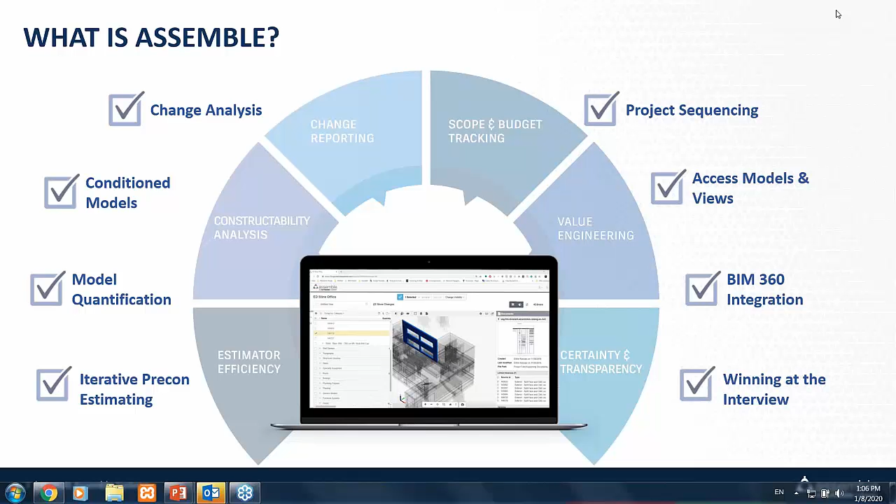Really easy system to get up and running with. These guys are going to show you some simplified workflows and dig into some more complicated data analysis. But ultimately, our key mission at Assemble is to break down and simplify access to BIM information and allow your entire team to leverage that data. Ultimately, we exist primarily in the construction space. Our customers are typically general contractors.

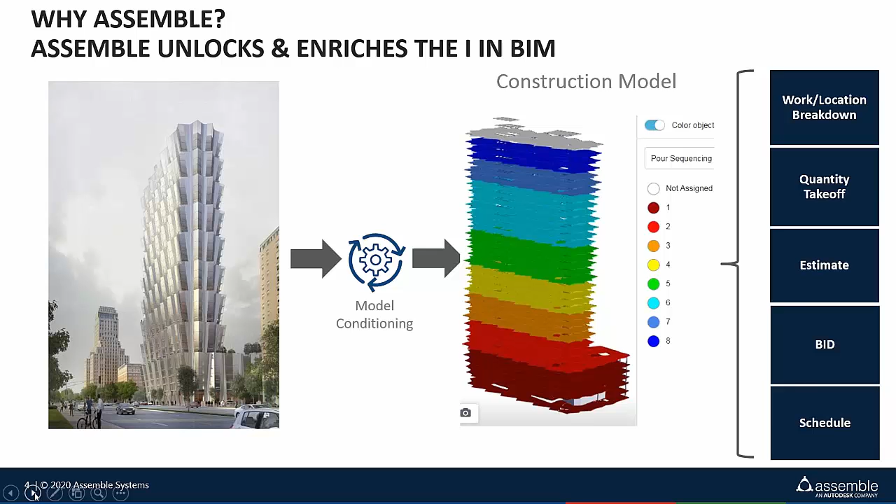And what we like to do is evaluate how we can take design content that comes from architects and engineers, condition that information, and make it valuable for the construction workflow, the construction team. In front of you, you see an output from the design team. That's a good-looking rendering. Well, those good-looking renderings aren't quite so valuable as the ability to communicate a task at hand, or the way you need to break down pours, or the way you need to organize your construction team for various workflows. Over to you guys, Tomislav, and talk a bit about Clayco.

Thank you, Tim. So before we dive into the nuts and bolts of our Assemble implementation, I'd like to use this opportunity to familiarize our audience with who Clayco is. And sometimes that's almost difficult to explain because we are a very complex, but at the same time very streamlined organization that in its core is a real estate developer and design builder.

We are comprised of several entities whose purpose is to deliver projects as turnkey solutions through optimized processes. Basically, we do everything from finding the sites, providing financing, design and construction services, and ultimately handover. Founded in 1984, so we're almost a 40-year-old company. We count more than 2,000 employees. Our past year revenue was a little bit north of $2.6 billion, and we have a nationwide presence.

One of the Clayco trademarks is our emphasis on quality and safety. They go hand in hand. And we have a strong presence in several markets: industrial, corporate, healthcare, and institutional.

So let's talk about what it means to deliver projects in an integrated way. As I mentioned, we are all about complexity in terms of organizational structure. But it's also worth noting that the main axis of our design-build model is structured around three subsidiaries.

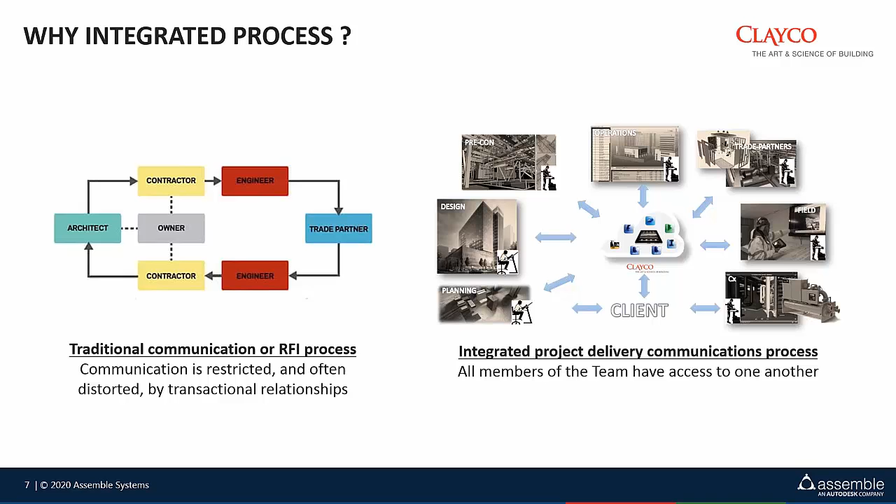And one of those companies is Autodesk, where we are actively collaborating with them in improving our day-to-day workflows. And this is the agenda for today's presentation.

I wish I could be the one taking credit for all the whiz-bang stuff that Leon will share with you. But we want to guide you through a gamut of activities where Assemble, as a tool in our toolkit, in conjunction with other software that is essential for our project delivery, can guide you through pre-construction processes, integration of scheduling, workflow, bringing all those elements in the field, and ultimately utilizing this data-rich source for enterprise-wide reporting. And with this, Leon, the show is yours, so I'll mute myself and enjoy the presentation.

Thank you very much, Tomislav. So this is our agenda today. We're going to talk point by point and item by item based on this agenda. First section, we're going to be talking about adding value to the pre-construction workflows by Assemble.

So as you can see here, as a BIM engineer or anyone working in the construction industry or design-build world, we come across Revit and Navisworks a lot every day. And Assemble has a function for exporting the model geometries and model information from either Revit or Navisworks.

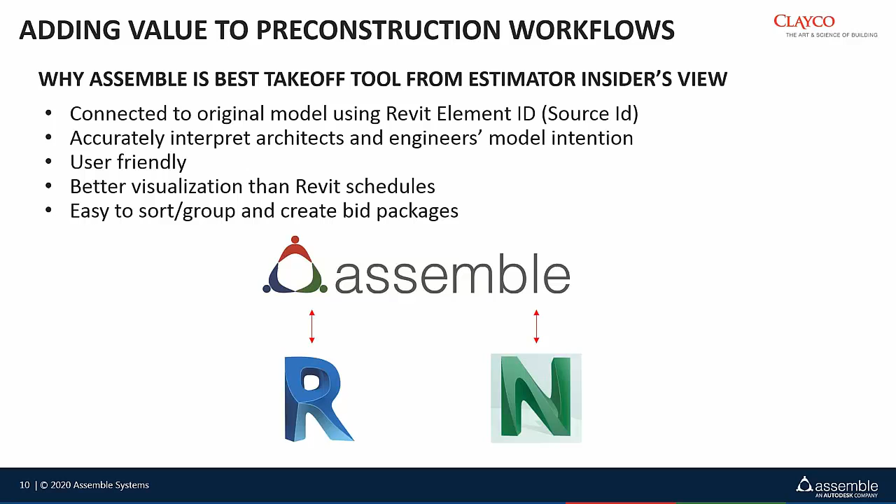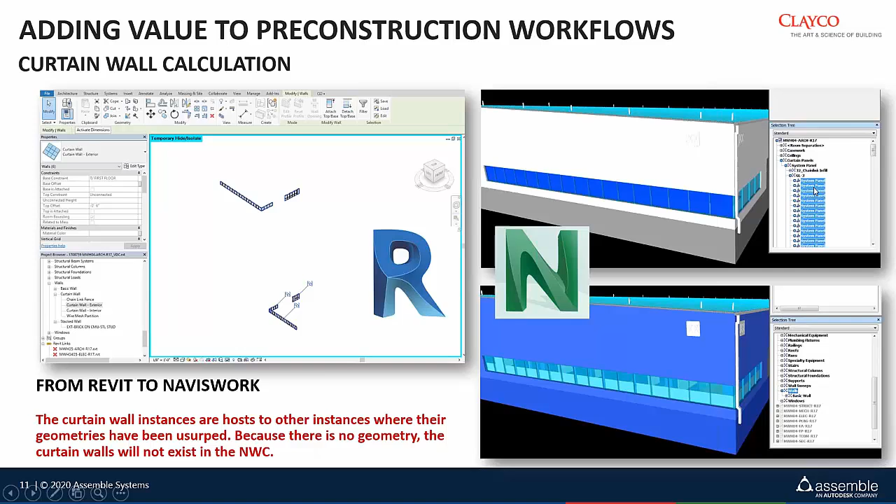So under the walls categories in Navisworks, you are not able to find curtain wall. And here in Navisworks, any software using Navisworks as a base software to export the model from, you are not able to get the whole square feet of curtain wall, because the only information which is beneficial for us in Navisworks is the curtain panels area. If you're adding up all the curtain panels area, it's obviously going to be less than the whole curtain wall system, because it's not counting the surface area of mullions.

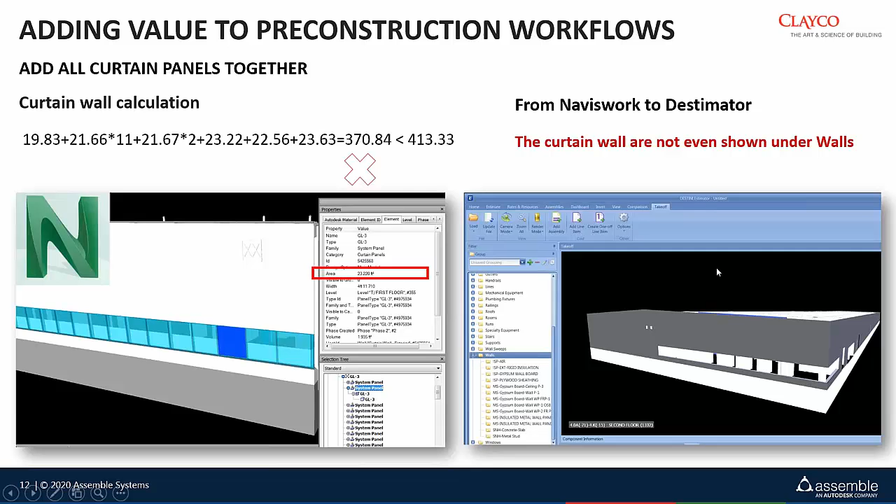So you see here, when Navisworks is exported into third-party software, the curtain walls are not even showing up. However, when using Assemble, you could see it's basically an apple-to-apple transformation from Revit into Assemble, and all the curtain wall systems are listed here. So this feature was not available just 1 year ago, and Assemble keeps getting requests from us and works on it, and now it is perfectly showing the whole curtain wall area, basically the curtain wall system area, and that's exactly the square feet the estimators want.

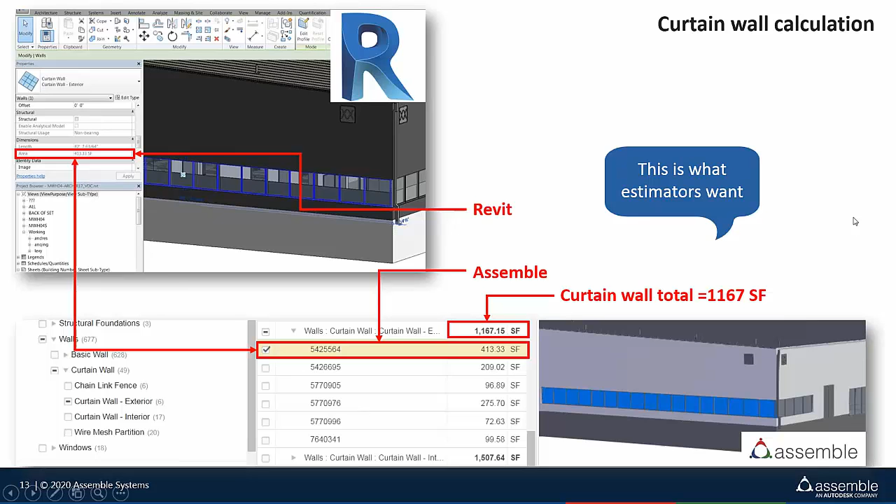One step further, when we're trying to compare the models, in construction as a general contractor or design builder, there are a lot of situations, a lot of design iterations, and also we want to compare the model between design intention and the real fabrication model. Here we're talking about Assemble and BIM 360 Glue. So we're using Assemble here to compare the design iterations, because most of the time it is the same designer. They inherit the same element ID in Revit.

So you could see here as a quantity takeoff, which of the items are added, which of them are moved, which of them changed, and you could export these quantities to an external Excel sheet for estimating purposes. However, when you are trying to compare the design intention from the designers to the real fabrication model from fabricators, we're using Glue. The reason we're using Glue here is because we use fabrication models for coordination in Navisworks, and Glue hosts all the fabrication models for Navisworks, and that's why we're comparing the fabrication model and design model in Glue. So you can see what's the discrepancy here between the design intention and real fabrication model.

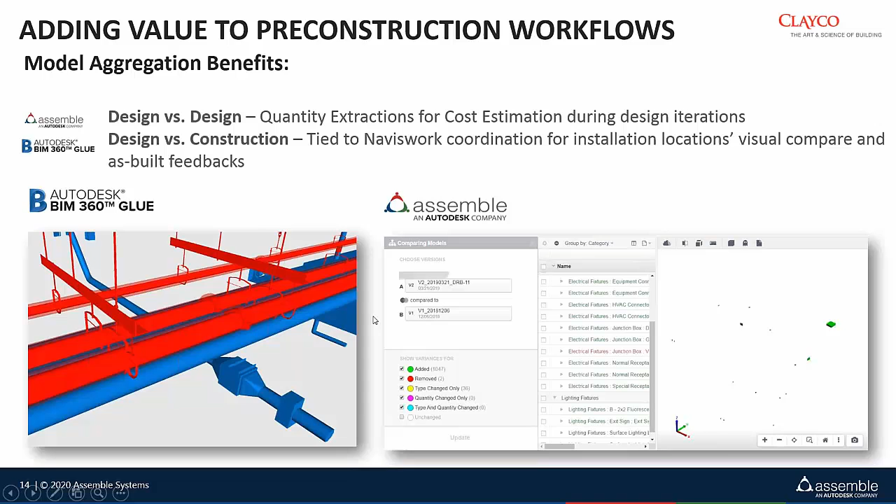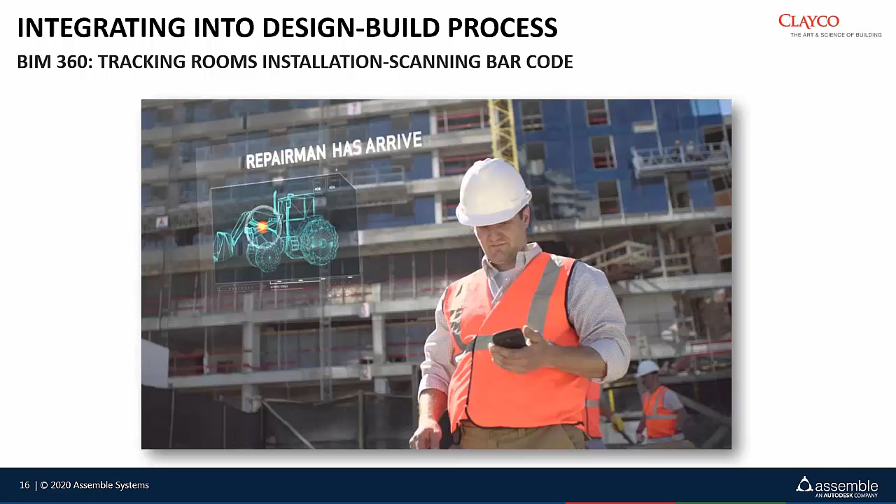And coming to our second section regarding the design build process. So design build is a very broad concept, but I'm just using a concrete example to illustrate how we have been using Assemble to facilitate this procedure for our design build. So for this small mini project, the final goal is to track the construction status of each room. Since it is a renovation project, some of the rooms are under demo, some are installing new drywall, some are installing new MEP, some are under painting. So our goal here is to track the construction status of each room so that we know the impact on the budgets and future schedules. That's the goal of this mini project.

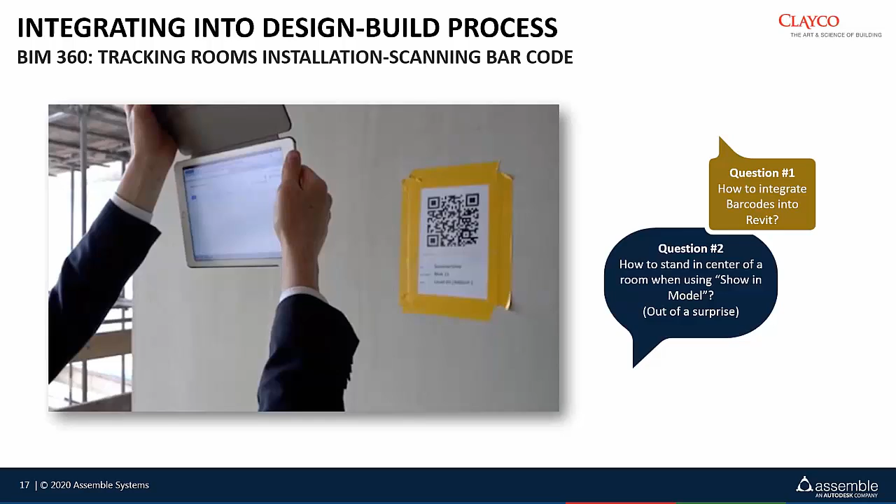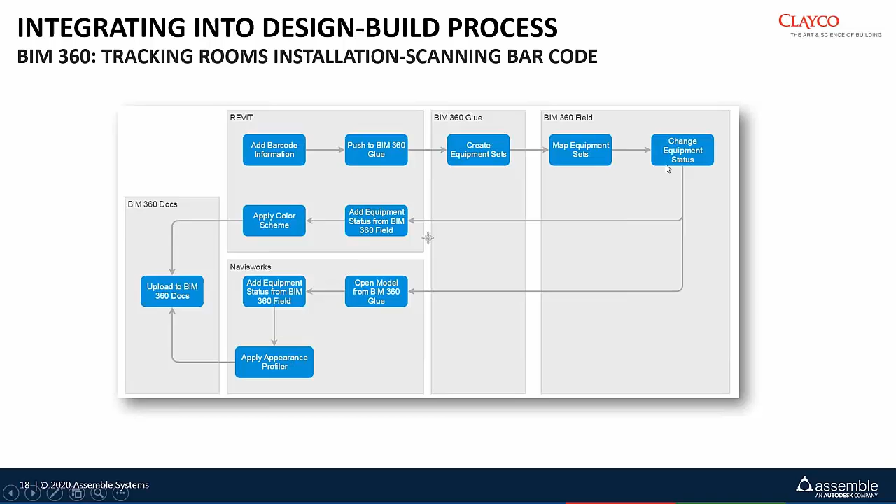And I'm going to talk about the old workflow and the new workflow here. So while we're tracking the construction status using the old workflow, it didn't give us a nice angle of the room because a room is basically a transparent box in Revit. And this is the old workflow we had been using before Assemble. You can see we're using Docs, Revit, Glue, creating the equipment sets in Glue and mapping to Field, and Field synchronizes it back into Navisworks to see the overall view.

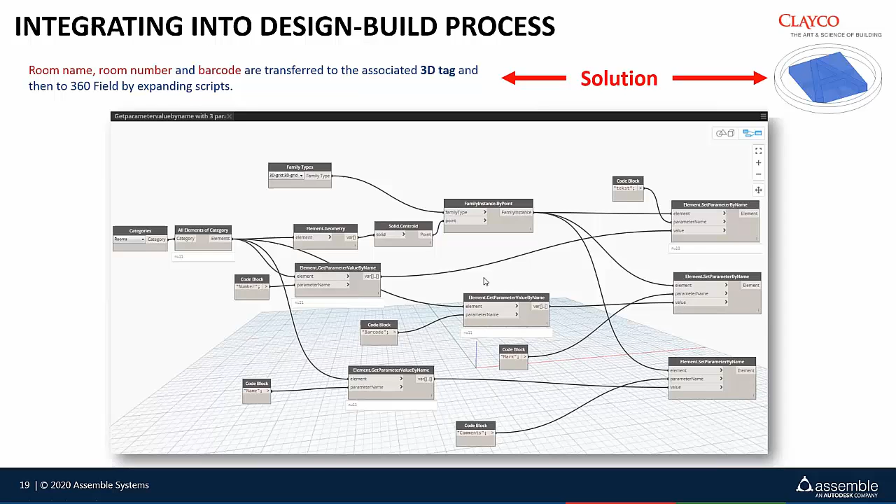And the whole thing is facilitated by the Dynamo script because we want to stand in the center of the room in the BIM 360 view. So that's why we're introducing the Dynamo script here. And you can see in the old Field how we're changing the construction status of the different rooms in BIM 360 Field. However, Assemble covers all this Docs, Revit, all this workflow facilitated by Dynamo, in one single platform that is Assemble.

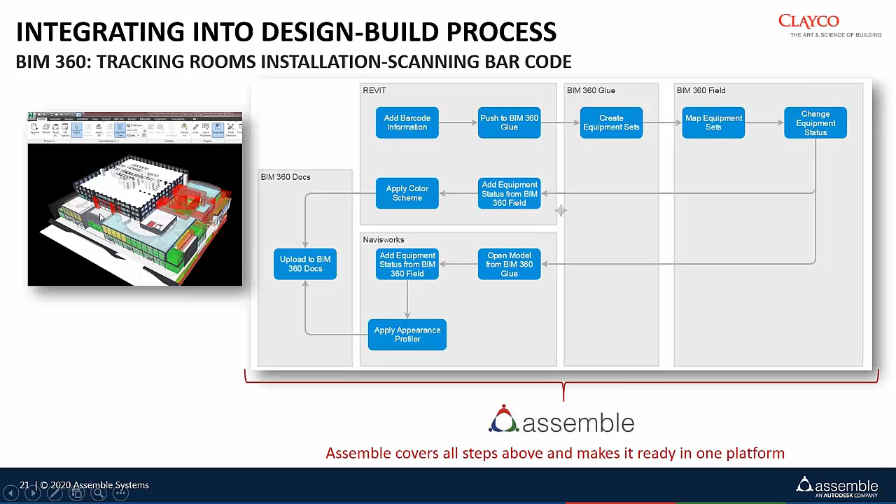And that's the deliverable from the old workflow. And you can see the new deliverable from Assemble, and this is how the old workflow looks. In the old field view, when it points to the room, you don't know where you're standing because, as I said before, of the transparent box of rooms, and after assisting with Dynamo, we know where we're standing.

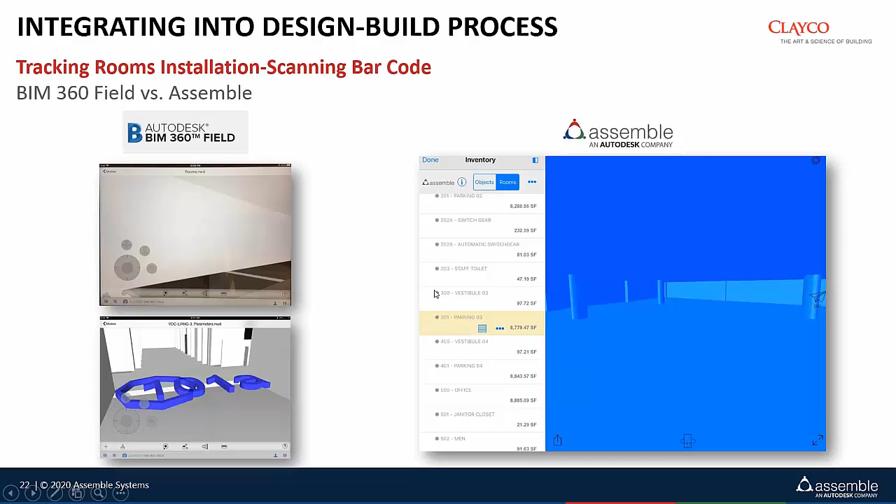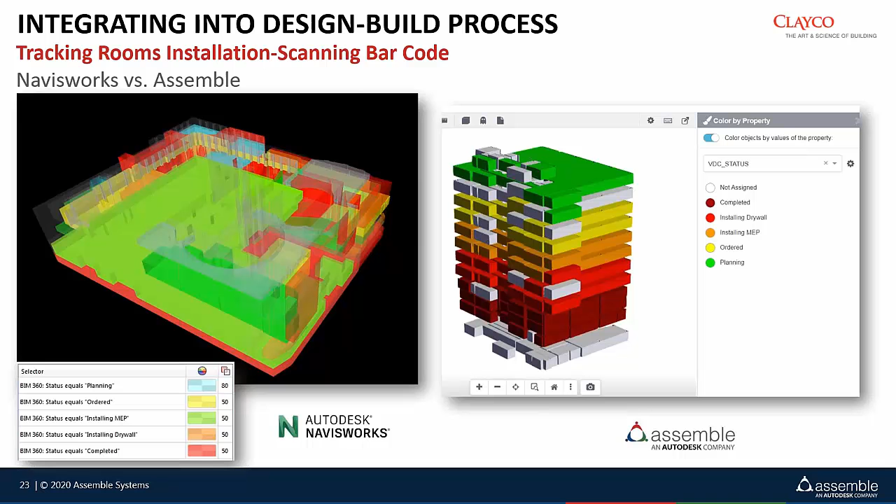Assemble covers this and updated this workflow. It brings you right to the center of this room, and you know where you are standing, incorporating the barcode scanning function. On the left side is the old workflow overview. You can see this is Navisworks. All the statuses are listed here: planning, order, installing MEP, installing drywall, and Assemble can mimic all these functions with exactly the same construction status on the right side. What Assemble is doing here saves a lot of energy and a lot of redundancies.

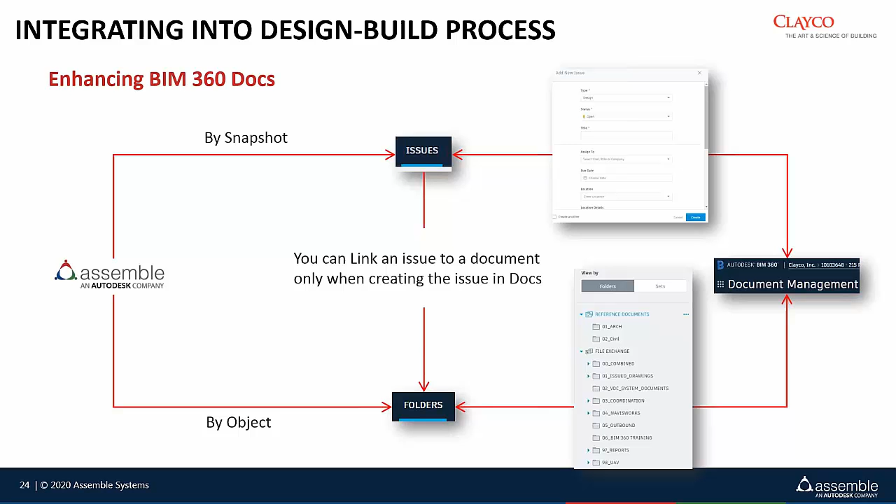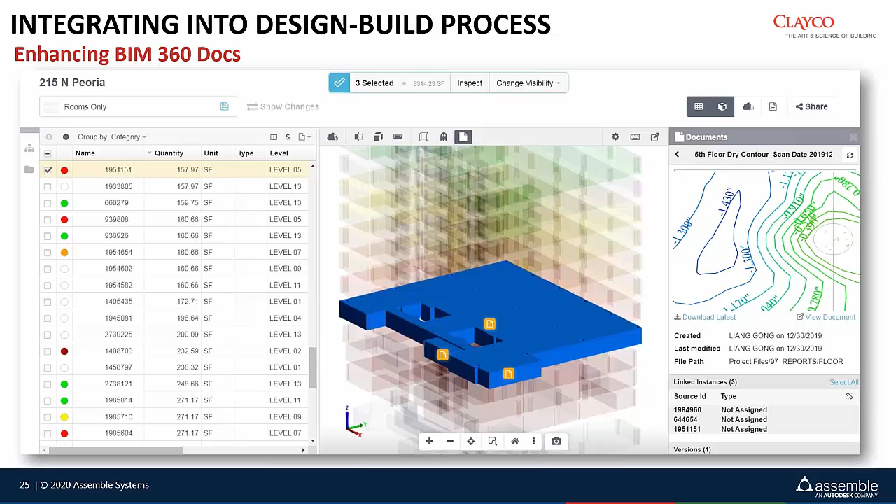And we are using this function, Assemble sync to BIM 360 Docs. With this function we upload our scan result of the 5th floor. You can see we linked this 5th floor room to the scanning result by using that function. So this PDF will be shown on BIM 360 after I upload it in Assemble and link it to the Assemble object. And you can even create an issue in Assemble here at this corner.

You can see the slope is 0.71%, which is out of our tolerance, and bring up this issue to our QA/QC team. And this issue is also reflected on BIM 360 Docs after being created in Assemble.

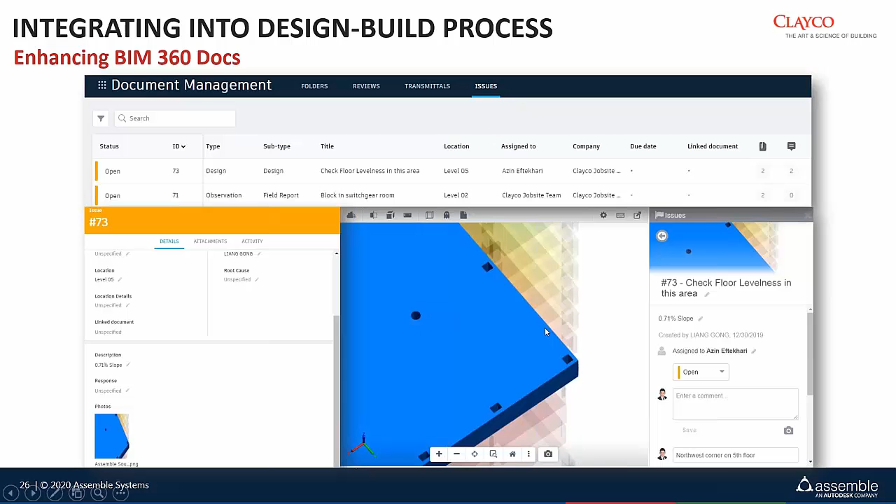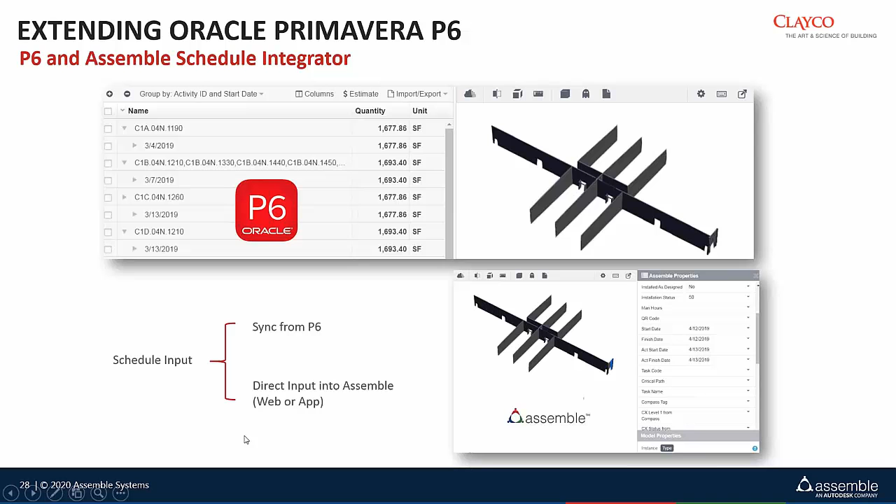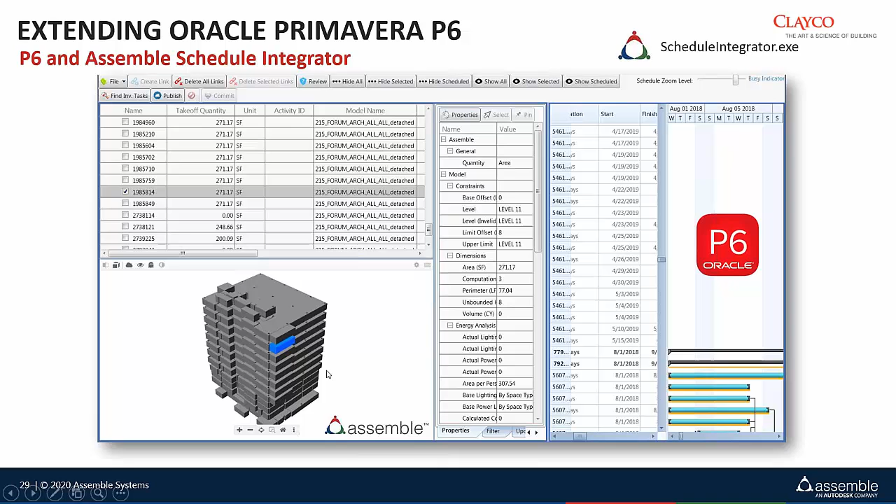Next section, we're talking about Assemble's integration with P6, the scheduling part. There are two different ways to input data into Assemble's scheduling mode. One is directly inputting into Assemble, either by the web version or the Assemble app, or you can sync from P6 directly. And how to do that? By using Assemble's Schedule Integrator. So basically, you're dragging the activities from P6 onto Assemble objects, which is very similar to the Navisworks TimeLiner.

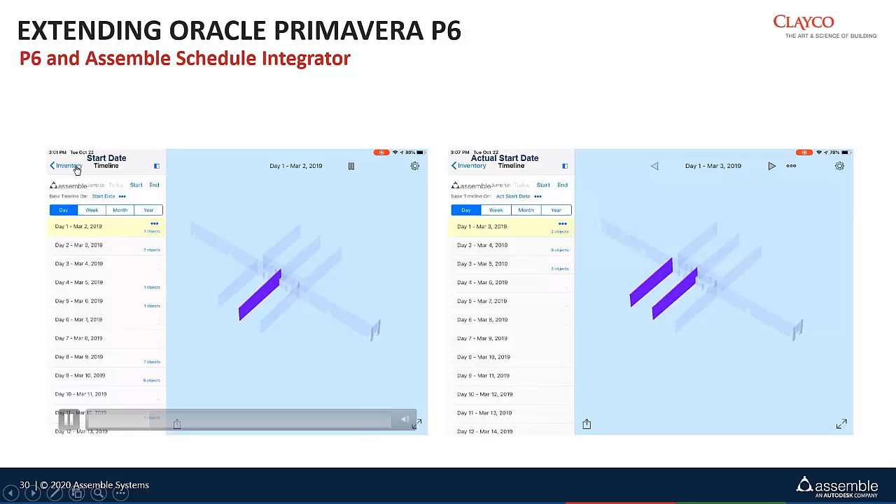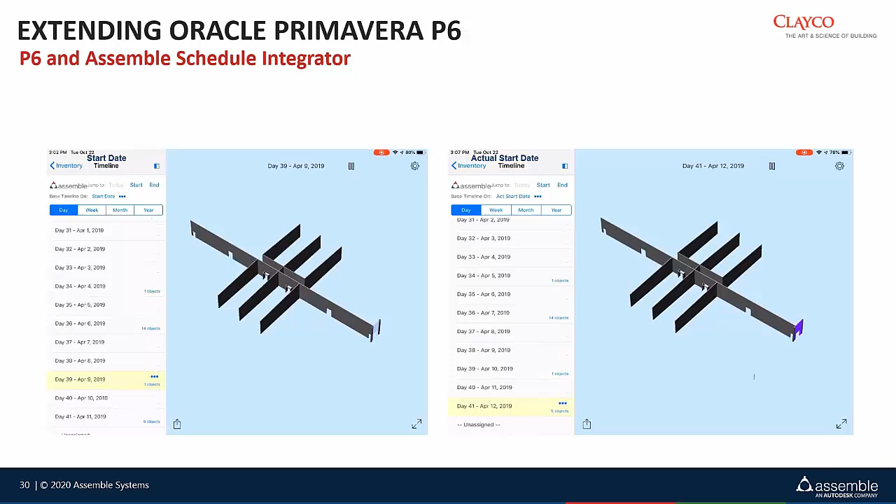And this is the deliverable. You can see the videos here are playing. This is the planned start date, and this is the actual start date. So why are we using the Assemble app to do this 4D simulation? Because it is very convenient and a very quick turnaround. It is especially great for one small area in one discipline. A lot of the time the PMs want to simulate or forecast the different possible outcomes by sequencing the different activities. So it's a much quicker turnaround for small-scale simulation than Navisworks. That's the benefit shown here.

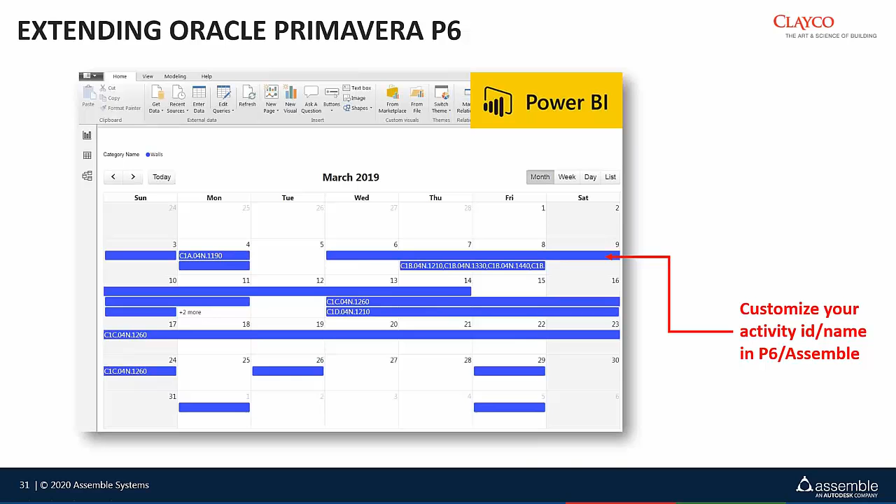Powering construction workflows. So we talked about the design-build process, and now we're going to narrow down into the construction workflows. In order to talk about the benefits of using Assemble for construction workflows, here we're using a specific example of tracking the installation status. At the beginning of this conversation, when I was talking about the design-build process, we were tracking the rooms, which are relatively like a container for different objects, for the drywalls, for the MEP equipment.

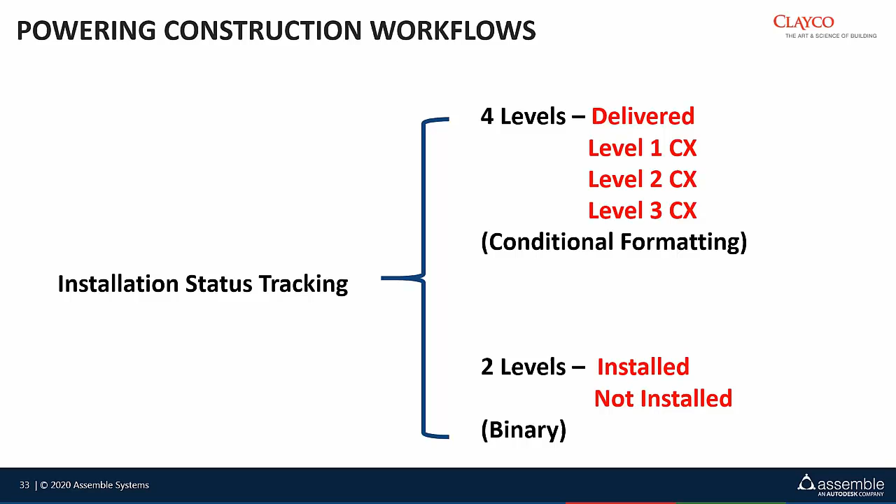So here we're only using 4 levels as an example to illustrate the workflow. First, let's look at the 4 levels installation tracking workflow. The owner's software to track the equipment is a flat 2D software, basically not a BIM software, so it is not great for visualization.

In order to reach the visualization, that is also the goal. I'm presenting this slide that by using Assemble, we could help visualize all the equipment tracking result. So we're exporting the data from the owner's software, importing into an Excel sheet, and Excel importing into Assemble, and doing some customization of the Assemble columns.

In Assemble, there are 2 different ways you could use it. You could either directly use the construction status result from the owner's 2D software and import it into Assemble, or you could input this data into Assemble directly. Basically, Assemble could be a data collector too.

With some manipulation of the columns here in the Excel sheet, you could also import it into Dynamo. So my understanding is Assemble is basically in the Dynamo function. However, Assemble saves all the energy for you to do the scripting and all the nodes in Dynamo, making it ready and easy for you to use.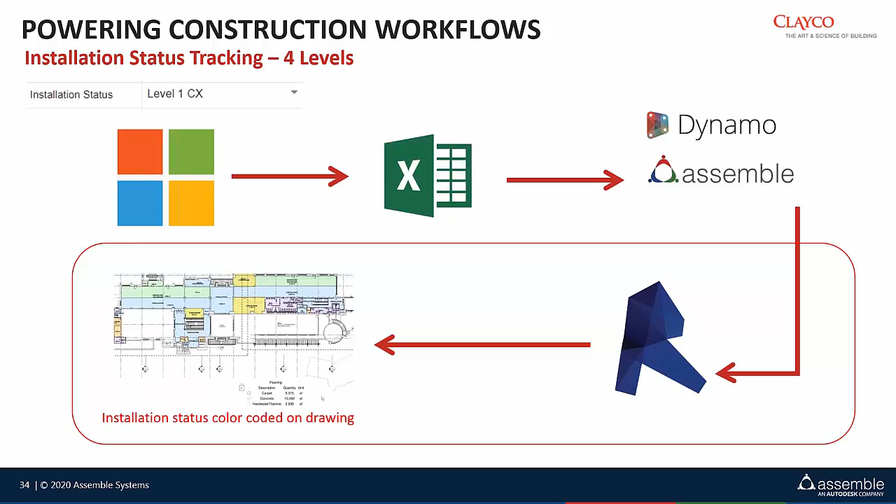So after the data is ready in Assemble, you synchronize it back into Revit, and you could create a nicely laid out block in Revit and generate a 2D colorized, color-coded report for the equipment tracking. So here you could see the result.

One of the deliverables here was talking about how you could set up the title block in Revit, and here is a place in Assemble where you set up this parameter, installation status, where you input level 1, level 2, level 3, up to level 10, and synchronize it back to Revit to create this 2D color-coded report.

This actually brings up more future opportunities. If at this stage Assemble could have a function for the reporting page, it could save us some of the energy needed to synchronize back into Revit to generate this report.

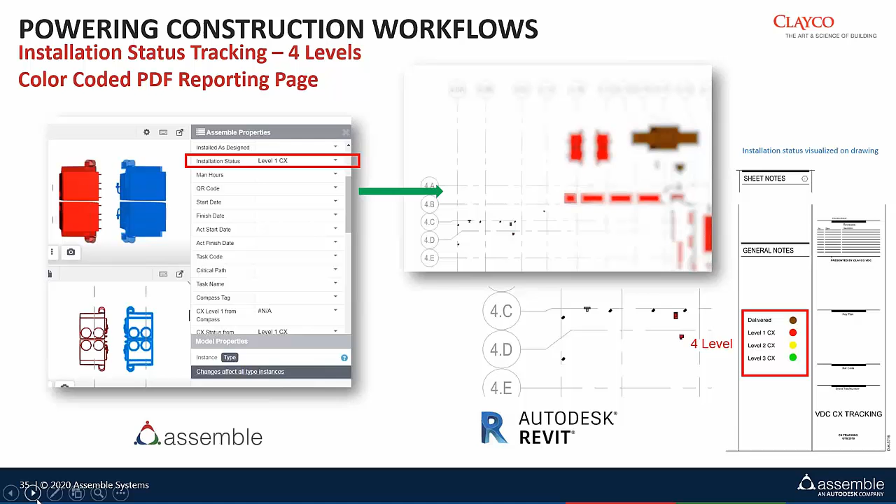So really quick before we dive into the next section, I want to point out and ask you - you have different needs for different visuals, different representations, and different ways of tracking it. From my perspective, I see the value in Assemble being that flexibility. Can you better articulate the why? You have a lot of different ways you're representing it, and you mentioned different consumers - can you hit a little more on why you see value in being able to do it differently here?

Yes. So I understand what you said, but from my perspective, I think the biggest advantage is that currently most of the models are modeled in Revit, and Assemble has such a close relationship with Revit. It is so easy to sync from Revit and sync back into Revit, and it depends on flexibility and adaptability. You could create parameters in Assemble very easily and very easily synchronize it back into Revit, the original design software. So I think that's the root of it, because of the close relationship with Revit, under the big umbrella, it's very easy to use.

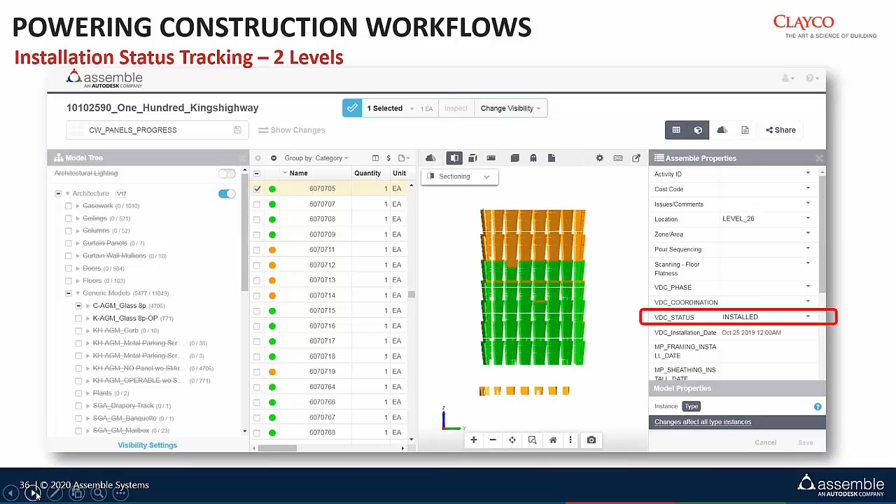Should I continue? Absolutely. Sure. Thanks for the question, Tim.

In the next part, we're going to talk about bringing it all together in Power BI, how we're integrating all the different platforms into one platform from the data perspective.

As Thomas was just talking about, the final goal is to make everything concise for the construction professional to use on the construction site. They like everything as simple as possible. They like to represent everything by color, no matter if it's the estimators or the construction managers. So it's better to represent it by color, which is shown here.

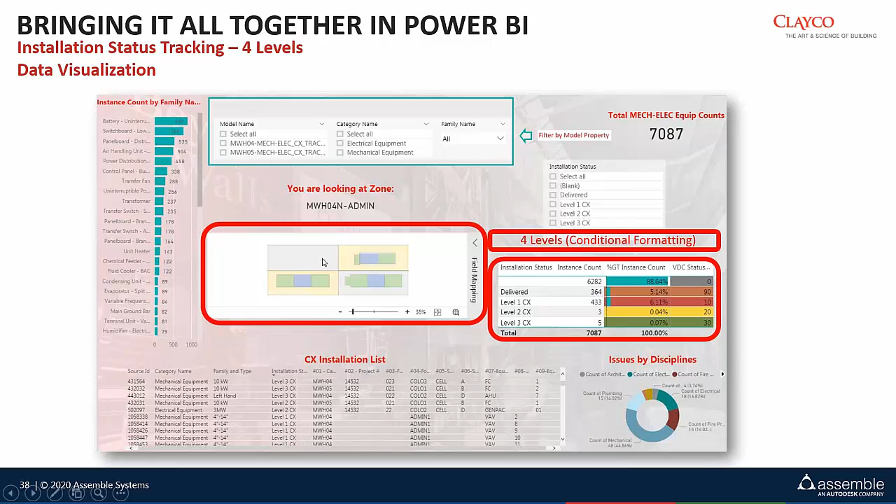However, there is a limitation in Power BI in that there is no way you could do conditional formatting in bar charts for multi-level commissioning. That's why I'm using the table in Power BI. So you're using an if statement in DAX or M language in Power BI to satisfy this conditional formatting. We're going to continue talking about the zones in the next couple of slides.

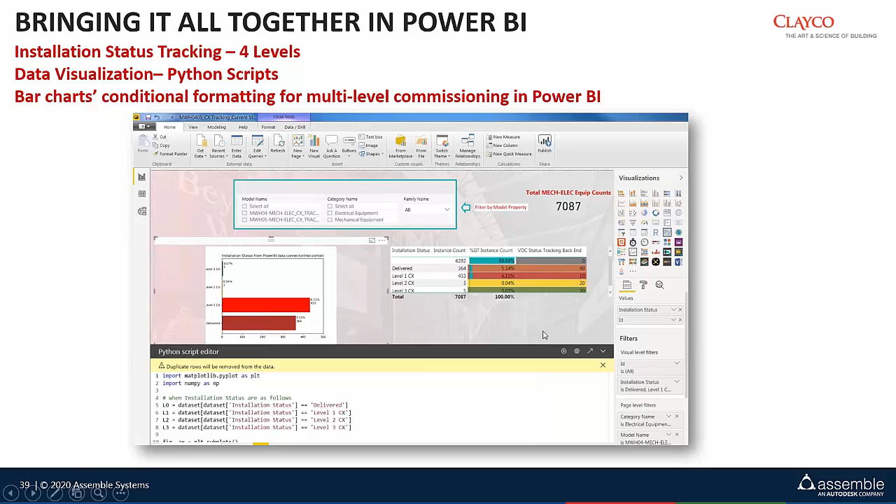So we went back into Assemble where they're inputting the data. We set up 2 parameters in Assemble. One's called VDC status, where you indicate yes or no, installed or not, and the next is about installation date - after it is installed, you need to record when it is installed. The problem here, why the bump is happening, is because we noticed that the construction professionals on the construction site randomly pick up an object in Assemble accidentally and throw in an installation date where actually it is not installed yet. So based on these accidents we found in Assemble, we think there are opportunities Assemble could explore in the future.

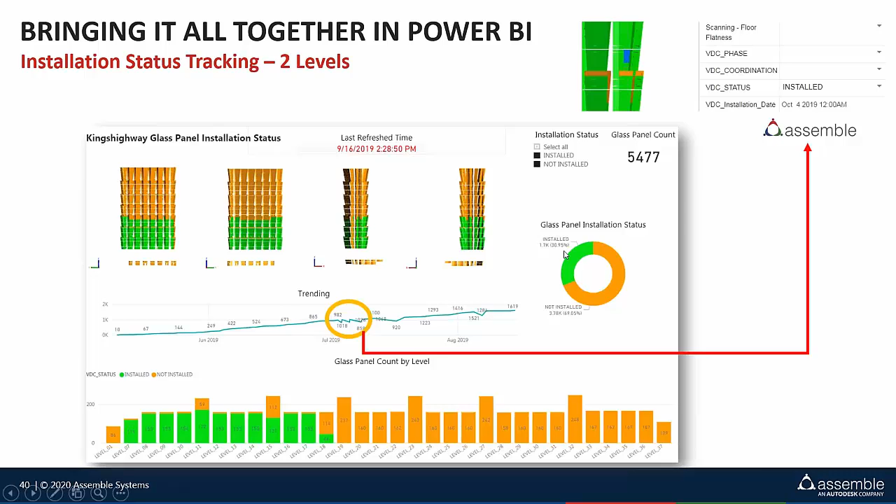This accumulation—you can see these are the accumulation and forecasting data in Power BI. It's really great for future forecasting, either for schedule purposes or budgeting purposes.

I'm going to jump in really quick and just say, as you go through this content and talk about data-driven analysis, talk about how you're looking at forecasting, and you mentioned different ways to do it, creating a Python script and this and that—I'm just giving my own anecdotal point of reference. I know from my time working with construction teams in the field, we did a similar process pulling things together in a macro-driven Excel workbook, just collecting a lot of data. From my standpoint, if I distill down what you're going through, it's this data-driven approach.

Construction projects can be quite complicated. There's a lot happening in any given day, and a lot happening as you stretch that out over the course of a month or multiple months. So what I'm hearing you say again and again is your teams love to have access to this data, and all of this preparation work is about giving them the right information when that conversation is happening and that discussion about a particular component is going on. Any more you'd like to add about leveraging that data and actually using the output?

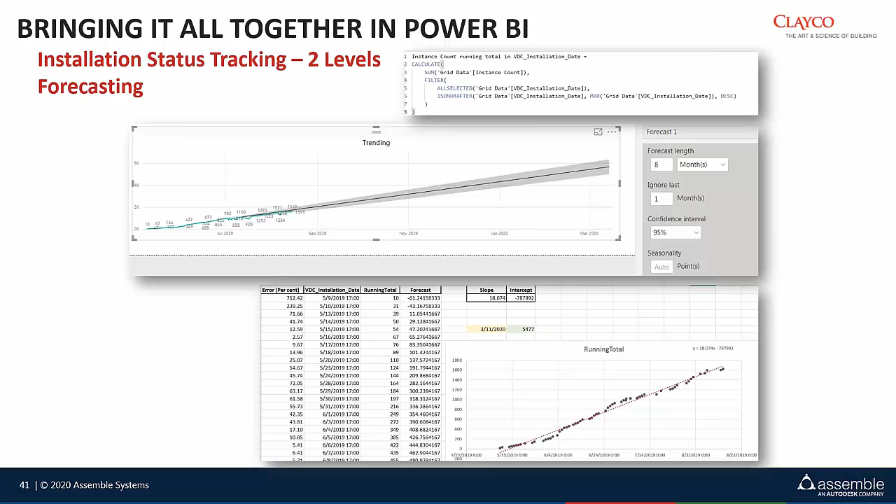So we're talking about this Power BI and Excel sheet. All this data is imported from Assemble, and this is Power BI's forecasting—you can see the confidence interval. Here's a forecasting in Excel sheet, and it looks like a linear regression, but it's not really a linear regression. Based on this forecasting, you can see the finished installation of these glass curtain panels is March 11th, 2020. This is a very basic forecasting, and there are also some future opportunities lying here.

Next section, we're going to talk about BIM Track coordination, how Assemble is facilitating this coordination process. It's kind of an extension of Assemble's function.

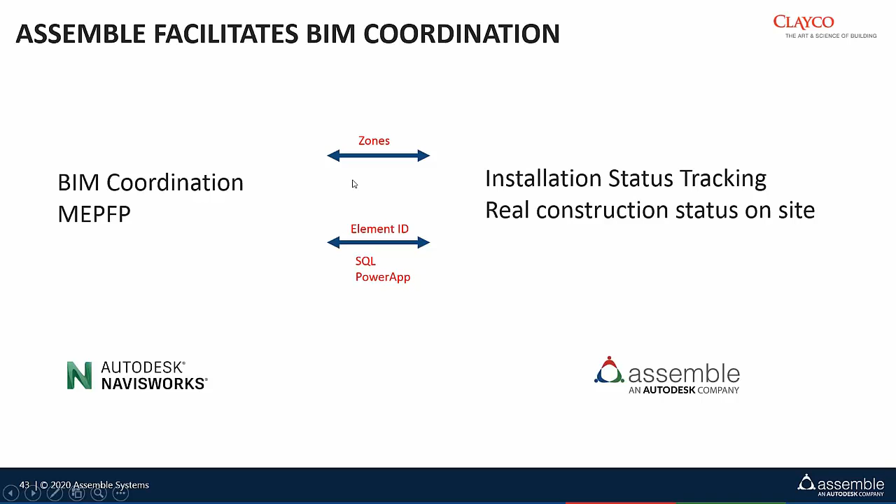So we're going to talk about how Assemble is going to facilitate the coordination backed by Navisworks. There are two different methods. The first method is by the zones, and the second method is by the element ID.

And we were talking about this map in the previous slide in Power BI. This map is imported from Revit into Visio. This map contains the XYZ information, basically the geolocation information from Revit itself. For the first method, you could draw simple zones in Inkscape and import them into Power BI, or you could have the 3D model imported into the Power BI web service. So these are the different ways to do that.

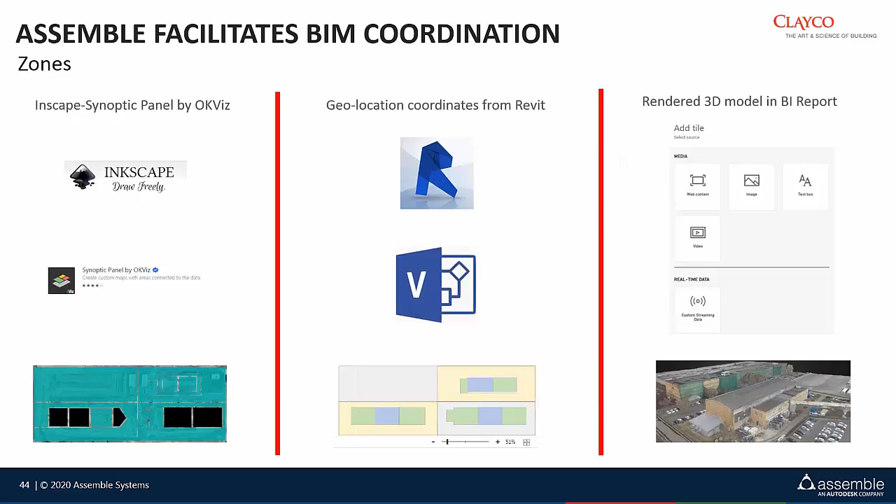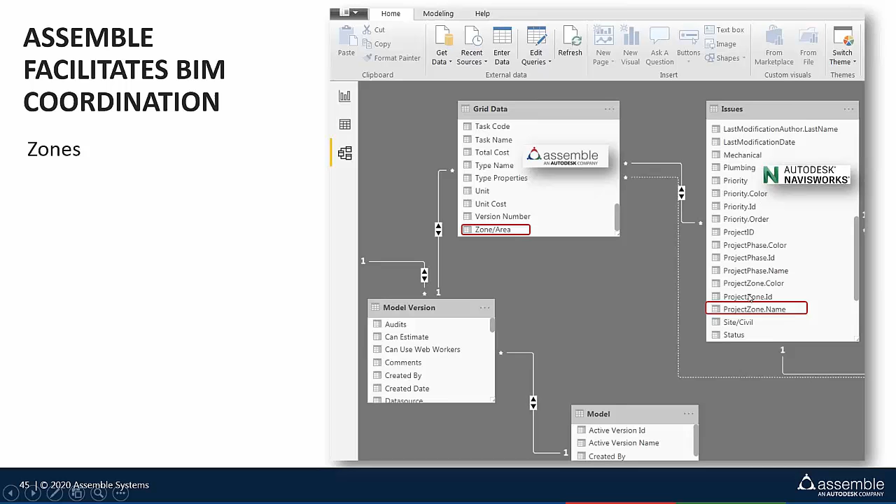Here in Power BI on the back end, you could see the zone and area defined in Assemble. And you could also see the project zone name defined in Navisworks. So by linking these zones between these two platforms in Power BI, you could see this is the result, the datasheet result in Power BI. This is the map we're talking about. This map contains both platforms, Assemble and Navisworks.

So a lot of conclusions could be taken from this one single data sheet, and this is the example I give on the bottom. For example, as I click on this area, the installation status shows everything is installed; however, there are still active issues in Navisworks, which means the installation on site is not strictly following our BIM coordination. So you could get different kinds of conclusions from this one single data sheet by linking the zones together between these two different platforms. And the second way we're doing this is by linking the element ID.

Why are we doing this? Because this is a real example from when we're doing BIM coordination. As you can see on the left side, this is a clash. It's also an issue, which is a very typical image in Navisworks. These two objects from two different trades are clashing with each other. During coordination, someone asks the question: they want to know the cost impact of this object. And if it's a renovation project, they want to know if it has already been installed, its current status.

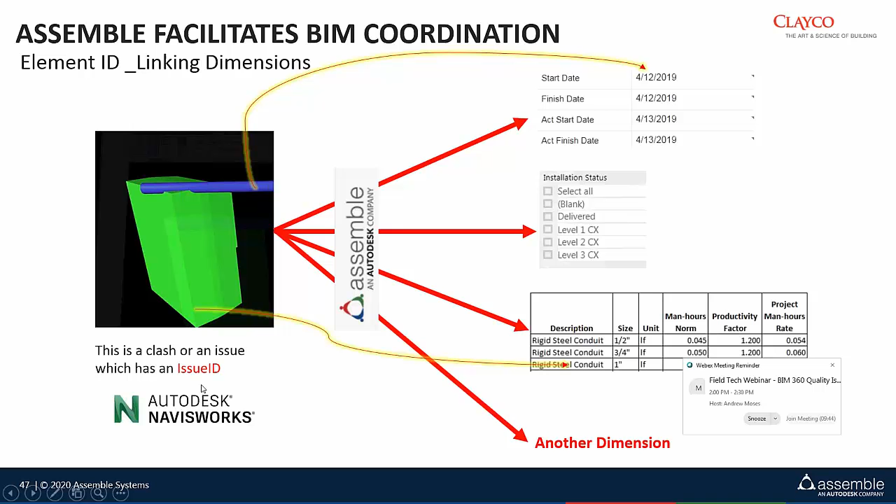So we want to know the detailed information of each of the items, like the scheduling information, the real installed information, the pre-con information. You could add all different kinds of other dimensions. All these dimensions on the right side are covered by Assemble here. So the goal here, in order to achieve this, is to link the issue ID, or basically the clash, with the element ID.

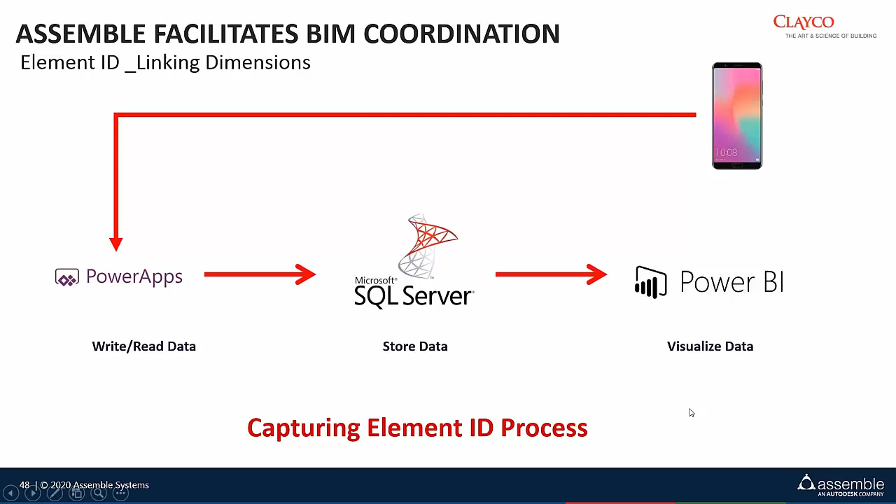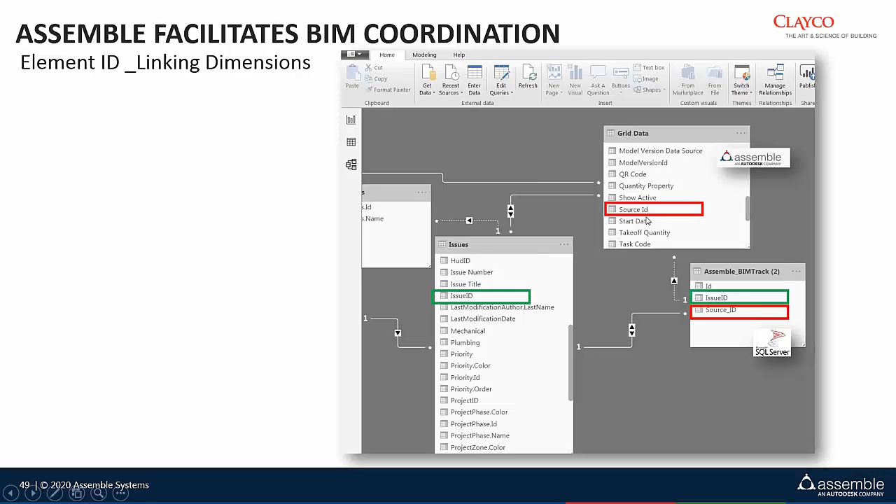And this is the workflow to link the issue ID and element ID. You could either input the data directly into Power Apps or scan the element ID using a barcode, with the data saved on our SQL Server. Basically, it's a one-to-one relationship between the issue ID and the element ID, and the visualization is done in Power BI. This is what I was talking about in SQL Server. You can see here the issue ID is apples to apples with the issue ID on our server, and the source ID, basically the element ID, is apples to apples with the element ID on our server.

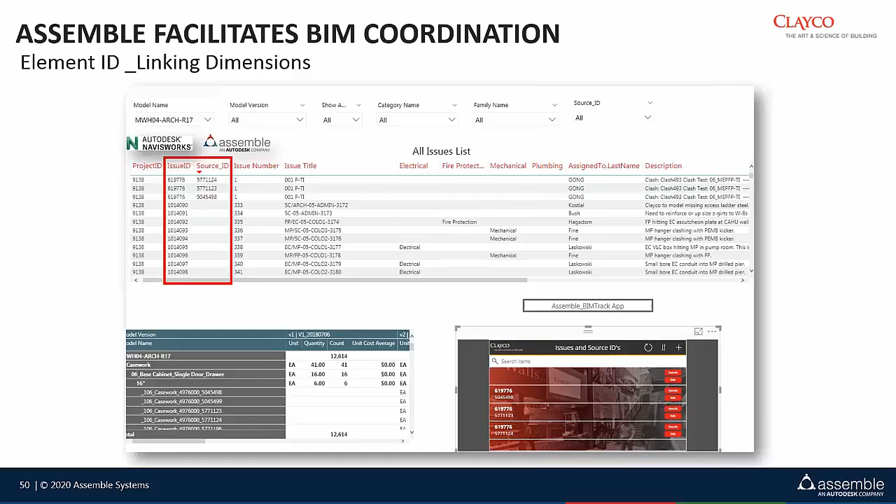It's very flexible and adaptable for Assemble to provide these flexibilities for us to manipulate and extend its functions, to utilize in our typical construction or BIM workflow. The results, I'm going to give this section to Thomas Love to talk about.

Thank you, Liang. Well, to define the bottom line, obviously part of the presentation was to show real existing workflows, and the other part was to maybe enlighten on opportunities that one can have when you start combining different applications that are utilizing the same data source, or finding bridging components between different data sources, which is not uncommon to have on jobs today. But if we need to boil it down, what does this mean for us as an organization?

We have noticed some really significant improvements through utilization of Assemble with our takeoff process, and in that regard also in a highly cyclical design-build environment where you go through many iterations of proposed design and you're bouncing back and forth between pre-con, preparing a variance report on the amount of content that is being added to a model or ultimately construction documents is amazingly easy through this platform.